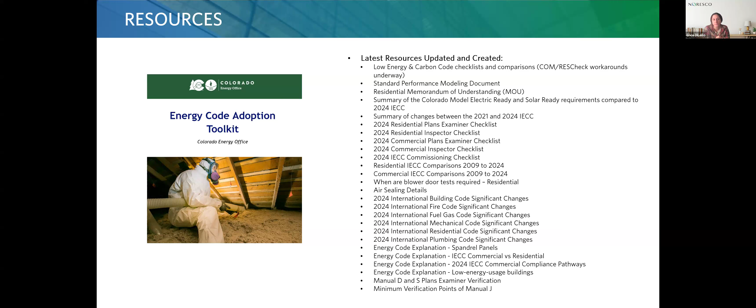Let's see what we got here on the last screen. This is probably my favorite resource and is available to anyone working on a project in Colorado, plan reviewing a project, or inspecting, you name it. You can submit a question on any of the I-codes, not just the energy code, and a subject matter expert gets back to you within a couple business days. It's a really great resource. Even as a homeowner, I've used it as we're doing plenty of remodels at our house, and it's really great to just understand what I need to do to comply with code, or what I need to inspect, or what I need to plan review. We're happy to walk through all of those items with you.

Let's get started with this presentation. Today we're going to talk about what is continuous insulation and when is it not continuous insulation—sometimes people think it's obvious, but it's not. We'll cover different types of insulation, the benefits, how to verify certain things through ES reports, how continuous insulation affects wildfire resilient construction, some common pitfalls, and a lot of helpful resources.

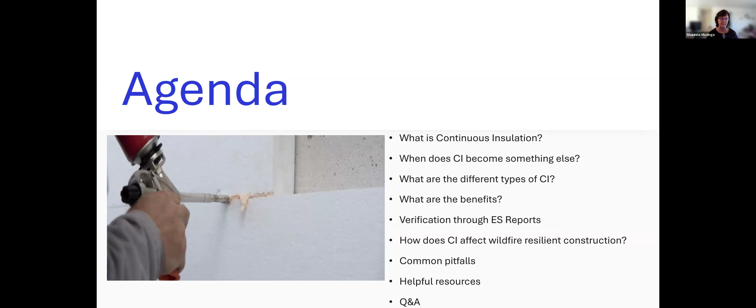So let's just dive in. If we look into the 2024 IECC and ASHRAE 90.1, and I think also the 18 and 21, they define continuous insulation. One thing I always tell people is you cannot use this energy code without paying attention to the definitions. It's one of the codes where you have to have the definitions chapter open at all times. Conditioned space—it's not what you think it is. There's all kinds of things that need further explanation in the energy code, and continuous insulation is one of them.

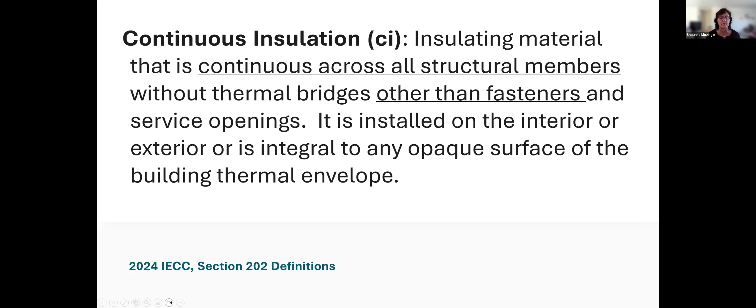It's defined as an insulating material that is continuous across all structural members, without thermal bridges other than fasteners and service openings. It's installed on the interior or exterior, or integral to any opaque surface of the building thermal envelope. So let's look at that—what is a fastener, what is a thermal bridge, and when does one become the other? When does it now affect whether or not I can call this insulation continuous?

He explains that a fastener is still technically a thermal bridge, but it's a fastener thermal bridge—not a linear or field thermal bridge. If you're familiar with the 2024 codes, thermal bridging starts getting addressed heavily for commercial buildings, but for residential, even some jurisdictions are bringing in thermal bridge requirements. So it's very important to know these requirements. A fastener is considered a nail, screw, clip, bracket, or brick tie—something that might penetrate the insulation but doesn't break it up. It doesn't create a big thermal break for the whole assembly; it's just a point thermal break.

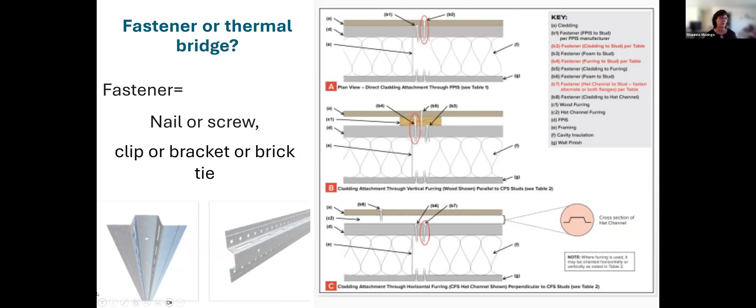So that really is kind of up to interpretation. I will tell you that the impact of the clip or the bracket or those kind of things, once you get past just a fastener, you probably need to incorporate some of this into the overall U factor or R value of your wall, so you're looking at the whole assembly and what's in there. When you get a lot of metal in there, it does change the performance of the wall a little bit, but not as drastically as something like a Z channel, right?

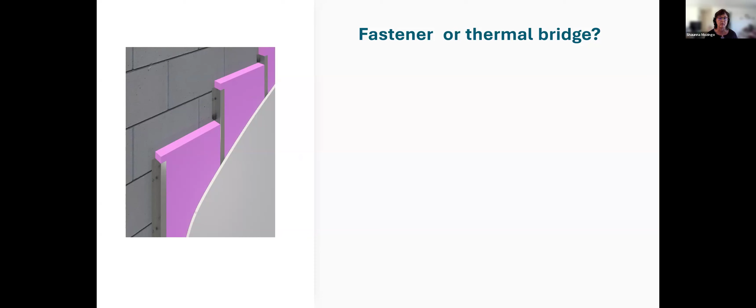That actually forms a full length thermal break. This is no longer a fastener. This has now created this insulation to be a cavity insulation instead of a continuous insulation. This is a full length thermal break, a linear thermal break of the cladding system. So you just need to know the difference between those, what the code is looking at as far as those go. So right now we have this linear thermal break instead of a point thermal break, where we now have to consider this to be cavity insulation.

Once you do that, you also have to think about, okay, I have cavity insulation on the inside of the building, cavity insulation on the outside of the building. How do I evaluate that in ResCheck or in a performance software? I will tell you that 90.1, I rely on 90.1 Appendix A very heavily as a plan reviewer, because there's all the assemblies and what their U factors are and R values are based on how the assemblies are made, whether it's roof, wall, mass wall, anything, and how it's made up, every single layer of it, and it'll give you the overall U factor of that whole assembly.

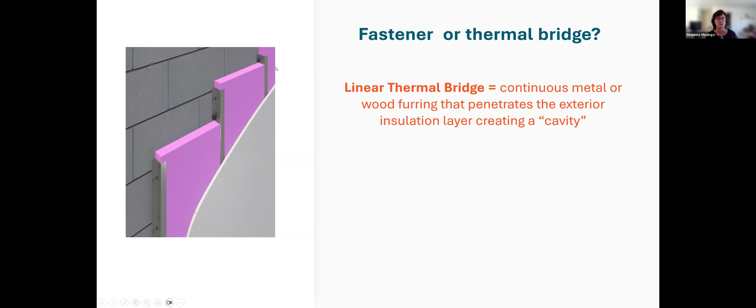It doesn't really have one in there right now for cavity and cavity, but the 2025 version of Appendix A will have cavity and cavity. So that's nice, we'll be able to evaluate that a little bit more for that U factor. But just want to know, I get a question all the time: if somebody uses these Z channels, can they still call it continuous insulation? By the letter of the code, no.

Several codes, right? Not just energy code. Also the IBC has requirements in there for fastening cladding or furring when you're using these foam plastic insulated sheathing as continuous insulation. So just know, I'm going to reference a lot today at continuousinsulation.org.

They really have, the industry has really stepped up. A couple of years ago, they sent me some questions asking what are you struggling with, what are code officials struggling with, what are designers struggling with, what are builders struggling with when it comes to continuous insulation, what do you need from us? And man, I let them have it, a one hour webinar on we need more details, we need more of this, we need more resources. And man, did they step up. They have so much information. Continuousinsulation.org is one of the places where they've really stepped up, and I'll show you more of that as we go.

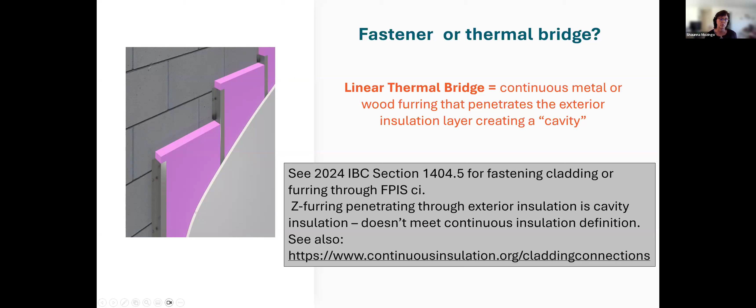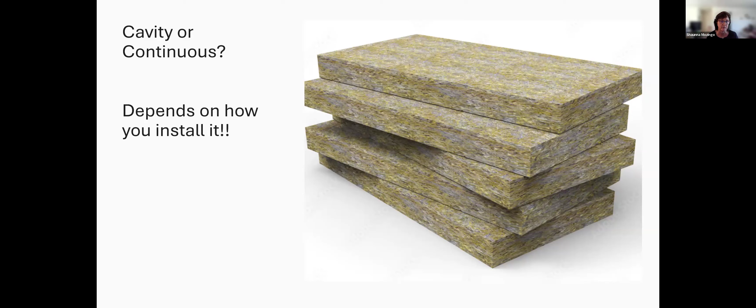But what is cavity insulation versus continuous insulation? That's another question that I get sometimes. Or if I'm reviewing a ResCheck or a performance report, somebody calls it continuous insulation, I go to look at the plans, I'm like, yeah, that's not continuous. What is it? It's not a product. A lot of people think, oh, I'm using rigid foam board, that's continuous. I'm using a batt of insulation, that's cavity. It has nothing to do, well, maybe not nothing, but not as much to do with the material as it does with how you install it.

So I can take rigid foam board and apply it continuously and have it be continuous. I could also cut it and put it in between two framing members, and now it's cavity, right? I can have blown in insulation, which is most of the time cavity.

I have yet to see a continuous blown-in insulation, other than sometimes in the attic where you fill up the truss bays with insulation, and that's cavity insulation. Anything you do over the top of that, some people might consider continuous. That's about the only time I've seen that.

I might have spray foam. Spray foam again is one of those products - unless it's in like a rafter seal, very rarely am I going to get continuous, because I would have to go over the studs to make it continuous. The whole idea of continuous insulation is to stop that thermal bridge at the stud, at the framing. So I'd have to go over that, which means I'm not going to install drywall or something, and so there might be some issues there.

I could have fiberglass batt insulation that is installed in a cavity - that's cavity insulation - but I also could have it hanging continuously on a wall, like in a basement. I see those, you hang it continuously and now it's continuous insulation. So just keep in mind the difference between cavity and continuous there.

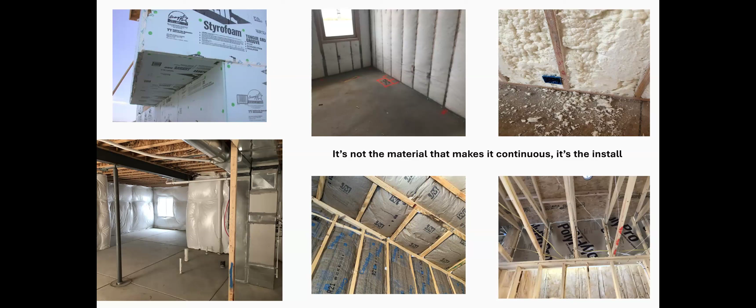Hey Shauna, we got a question. Yeah, more of a clarification - double wall framing, can that be continuous? We're going to talk about that in about 2 slides, probably, or 3. Perfect, thank you. That it? That's all. Okay, all right.

So we're going to talk about every kind of continuous insulation that I could think of, in just a minute. A couple things I want you to pay attention to, especially as a plan reviewer - and the more we start trading things off in the code or trading things down, this becomes a little bit important.

So I have this house and it's covered with continuous insulation. This is a house we did in a field study, I think in New Mexico, might have been Colorado. Anyway, when you get up close and personal, every insulation has to be marked - the code says how it has to be marked, with its R-value and all of that. It's interesting to see on some of these insulations where every manufacturer and every type of exterior or continuous insulation can have a different R-value per inch.

And even with this one manufacturer, their different series - the 150 series versus the 250 series - has a different R-value per inch. And it also acts differently at different climates. The colder it is, the more it's resisting that heat flow, so you have a higher R-value, whereas in warmer climates you might have a lower one.

So how do I know what the true R-value is of this? There's a couple things to know. So if somebody says on their plans, oh, I have 4 inches of EPS or 4 inches of polyiso or whatever - that doesn't tell me anything, because depending on the series it could have a different R-value per inch. Different brands could have a different R-value per inch.

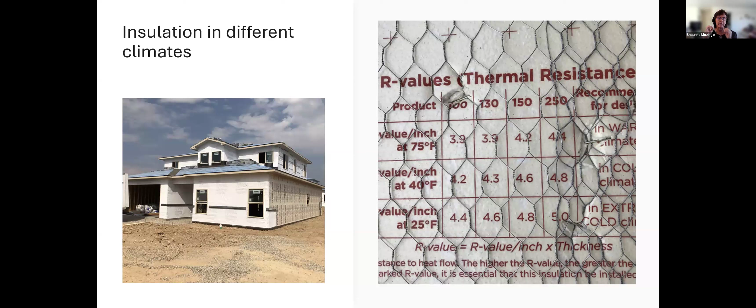So if they told me, oh yeah, my insulation is R5 per inch - well, it is R5 per inch in an extremely cold climate, at Series 250. But on a normal day by the code, it's a 4.4. Is it that huge of a difference? Maybe not, but it could be the difference in pass/fail if they're doing a REScheck or a performance report where they're counting on that R5 and barely passing with it. So just something to pay attention to there.

The other thing to pay attention to is when you call insulated siding continuous insulation. Poor Matt Dobson with the insulated siding industry - he and I fought for many years at the code hearings because I just didn't believe insulated siding should be called continuous insulation. And for many years it wasn't. But in the 2024 code, you can count insulated siding as continuous insulation.

Again, in chapter 3, it has to have the R value labeled on the product, and it has to meet a certain standard, and then it also has to be installed according to manufacturer's install instructions. That's just in chapter 3.

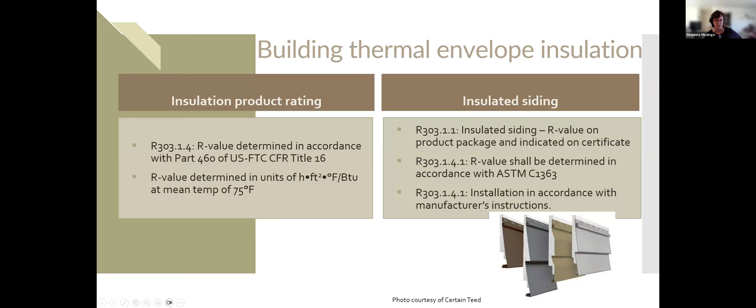But because of this continuous insulation, here's another slide that I use for a different class, but I wanted to show you because it has a better picture that this insulated siding, its thickness is different and it overlaps, and there's airspace and there's air movement.

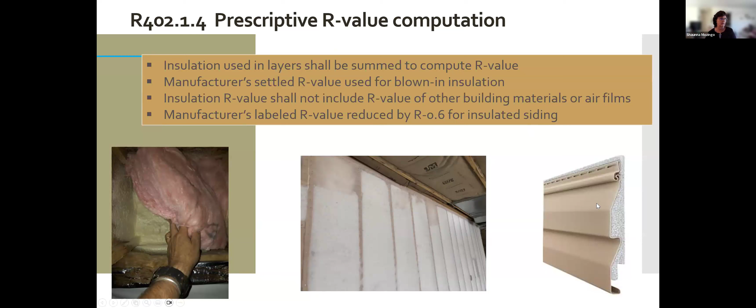So the code, the agreement between all of the people in the code hearings was, if you want to count it as continuous insulation, you can, but you have to reduce the R value by 0.6. Most of these come in at an R2 on the package. You'll see an R2, so now it's a 1.4. That's what you're looking at on ResCheck or something else. So make sure you're paying attention to that.

All right, let's look at the different kinds of insulation. There's a bunch of different insulations out there, a lot of rigid foam boards, some wools, some batts, there's all kinds. So let's just go through this. I know it's a lot of info on a slide, we're just going to focus on one thing at a time.

This XPS is kind of known for its strength and durability. It offers some pretty good moisture resistance, and so it's really pretty popular for below grade and exterior wall applications. It's about an R5 per inch, depending on the manufacturer and the model, if you will.

It's kind of a mid-range price between EPS and polyiso, it fits in there somewhere. One thing I think people don't realize about XPS, and even some of the other insulations, is that while they're slow to absorb moisture, they're also very slow to release that moisture. When insulation holds moisture, it loses its R value. So this insulation, even the manufacturers won't warranty it for more than 90% of its R value because it loses R value over time because it holds moisture. And the longer it's in, the less they warranty it, right? The warranty goes down over time, just like the R value. So just something to keep in mind about that product.

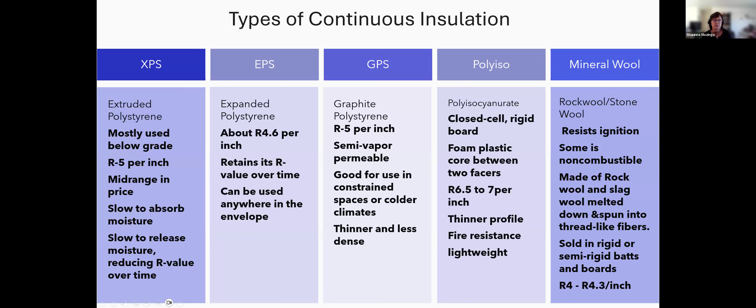It's sold usually in either a rigid batt or a board, usually in walls and attics, but we're starting to see more and more of the loose fill material being blown into some cavities. So a little bit versatile there, but starting to get more into that fire resistant construction.

What about a double wall? There's some great info on double wall. I can't get into it hugely, but I did a webinar, I think last year, on advanced framing techniques that really included double walls. There's also some great information by PNNL on that. So pay attention to those.

But the way the double wall works depends on how you build them. A double wall doesn't automatically give you continuous insulation. There's so many different ways to do it. A common one is to build two walls and offset the studs, offset the walls, so you have cavity insulation in both walls, but the studs are offset so you don't have that constant thermal bridge. That's one way of doing it.

Another way I've seen is to build one structural wall with cavity insulation, then a layer of continuous mineral wool or rock wool on that wall, and then build an interior second wall that just handles your plumbing, mechanical, and electrical. So that one wall that holds your insulation also has a layer of insulation on it. There's a couple different ways to do double walls and call them continuous.

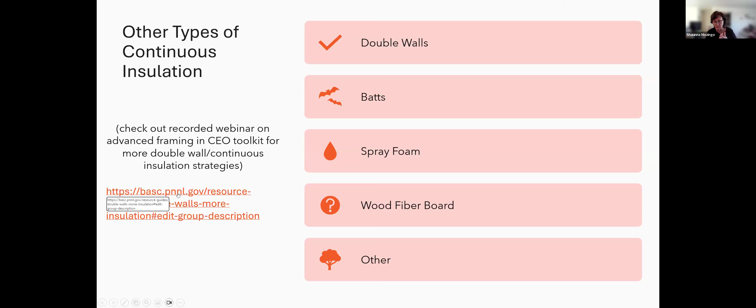The idea is that you have a continuous thermal break. You do not have thermal bridging where you have that heat loss through the thermal envelope.

Batts can be done continuously too. Like I say, you can hang a batt continuously or you can shove a batt into a cavity. So there's lots of ways that batts can be done as continuous insulation. I mostly see that in basements or crawl spaces.

Spray foam, spray foam, can you really do spray foam continuously? That's one of those where you'd have to go around all the studs. It just depends, maybe if you were doing that double wall system, you could fill the cavity plus go over the studs, then you'd have cavity plus continuous, and then build your second wall. Maybe you could do it that way because you'd put the drywall on the inside of that second wall. But it's harder to get spray foam or blown-in products like that to be truly continuous.

Wood fiber board, that's the insulation made from certified softwood chips. I like it because they're using the wood chips left over from lumber production. They create it into this loose fiber body that they use. The nice thing is a lot of times they'll mix it with borate, and so it becomes flame retardant and also resists mold and mildew.

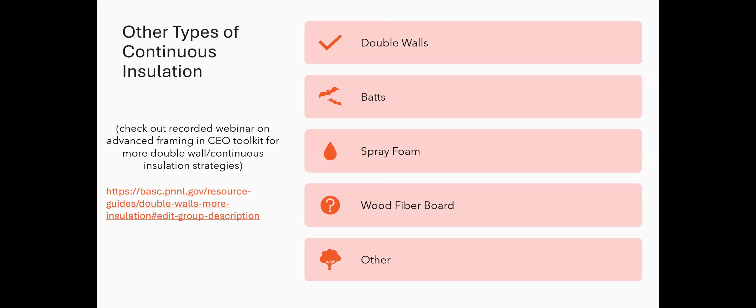Great, all right. Why continuous insulation? Well, people think, okay, continuous insulation is just more insulation, so there's probably better energy code performance. That's true — the building will perform a lot better because of the thermal break you're giving it. But it also has a lot of other benefits. It reduces the energy cost of the building, not just because we're heating and cooling it less — if you think about that benefit alone, a lot of people aren't thinking big picture.

We're reducing the cost of our energy bill because we're not having to heat or cool as much. The building is super insulated, so it stays the same temperature for a long time, and my furnace isn't constantly turning on.

So what does that do? That also means I probably can use smaller heating and cooling equipment. I don't need as many BTUs to heat that space, and it's not going to run as much. So it's not just an energy bill, but also the cost of the mechanical equipment and some other things we're going to talk about.

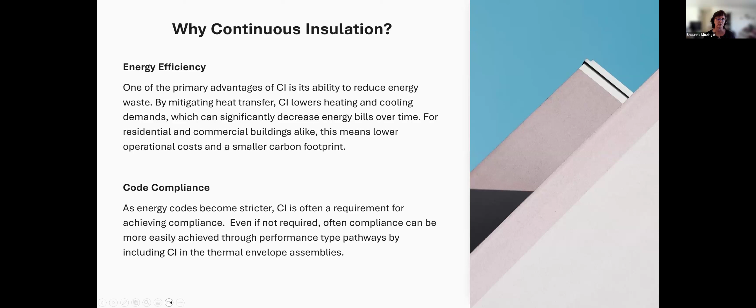So it's a big picture. Code compliance, sure—there's times where if you go prescriptive, it's going to require you to do two layers of insulation, a cavity and a continuous, or something. We're getting more options in there, so it's less times that it's required. But most people will use a trade path, and even then you're going to get a way better trade for continuous insulation than you are for cavity. So code compliance, it's pretty easy.

Thermal bridging is one of the big ones. Wherever I have studs, or metal, or concrete, or a patio that goes all the way through the whole thermal envelope, I have these bridges there where I'm losing all of this heat. And so continuous insulation stops that, and it offers some great things there.

It definitely reduces moisture damage, minimizes thermal stress, preventing mold, rot, and material degradation, and then enhanced comfort—insulation makes things more stable for the indoor environment. You turn your heat on, it stays that way, it's just not changing all the time.

One thing I will just say is, it's just like everything else—the tighter we make these buildings, and the more insulation and all of these, they all go together. You cannot ignore mechanical ventilation. You have to bring in some ventilation, so just keep that in mind.

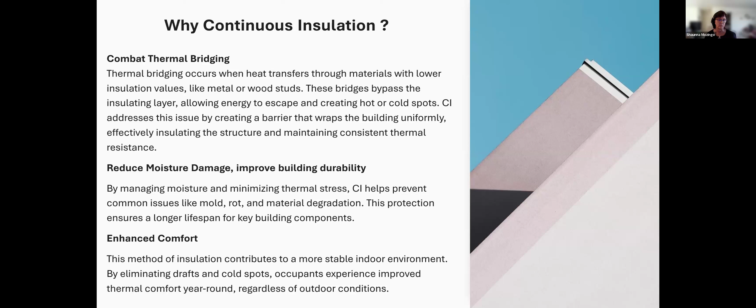Another thing is it's the key first step in building electrification. If you want your buildings to be all electric, you better make sure you're building buildings that don't carry very much load with them. When we were writing the 2021 codes in Aspen, the city council wanted all electric, and we said, wait, we have to start with a really good thermal envelope—build that first so we can bring those loads down, so we aren't talking about huge oversized panels and oversized transformers and crashing the grid. Let's bring the loads down first through a great thermal envelope, and then we'll talk about going all electric. It's one of those first key things people need to be doing, and I think people forget about that.

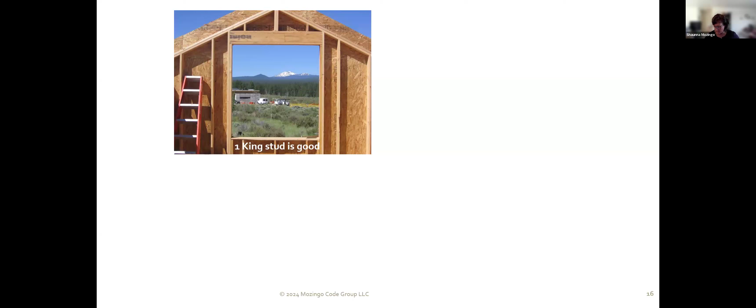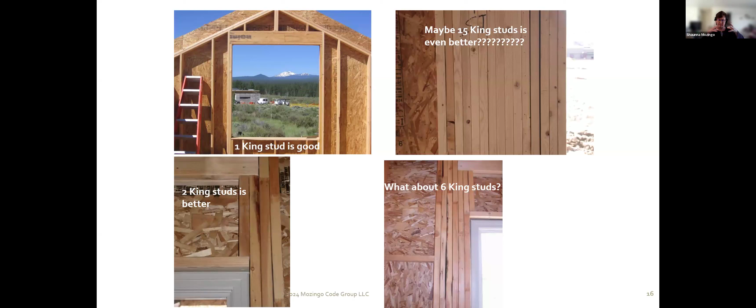Some things about thermal bridging—I always talk about this in my building science classes. We look at the structural provisions and think, okay, we have this window, framing it, one king stud will be good. Well, structurally two king studs is probably better. Well, six has got to be really, really good. What about fifteen? What is that doing to our envelope? Not only is it overkill structurally, but we get these things like stud packs, and what are they doing to our building assemblies?

So if you think about this, wood is only about 1 R-value per inch, whereas the insulations we saw are between 3.5 to 7.

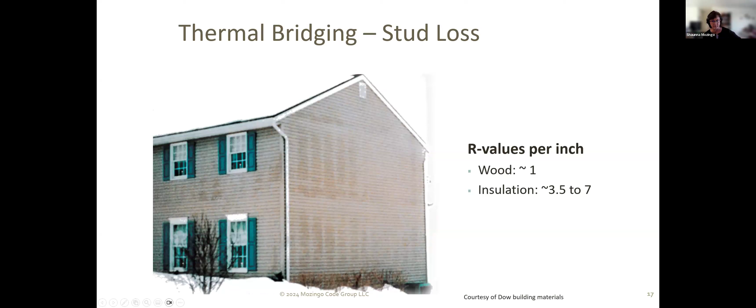We want more insulation than wood. What ends up happening is you can see on these buildings every single stud because of all that thermal bridging. There's only 1 R value per inch, so we're not talking about much resistance. We end up having all this heat loss. We don't get that if we put continuous insulation on the building, and we end up with a much better U factor and better code compliance. You're going to always pass much easier with continuous insulation than without it.

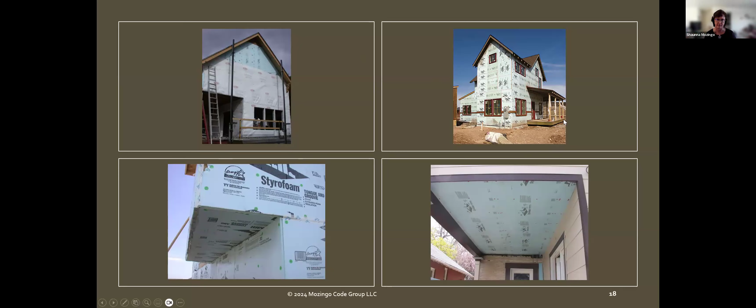Or you ever walk in - I want to teach a full day class, I could show all these pictures of here's why people think the code is so expensive, and it's got little pieces of spray foam blown everywhere, but it's not doing anything. Utilize it - if you're going to put it in, make it work for you. So there's - you can have one product that has many benefits.

You already have a water resistive barrier. It could be, depending on how it's installed, and you've got to pay attention to the joints and seams. One thing that I do is ask for the ES report, the ICC Evaluation Services report, to see if it was evaluated as a water resistive barrier, and if it has been, how it has to be installed to actually be called that. But it could be the water resistive barrier, it could be the air barrier if every joint and seam was sealed. It could be your vapor control layer.

Controlling vapor in and out of that assembly, both ways, depending on whether it's hot or cold outside. And definitely your thermal control layer. So if I have one product instead of 4 different products - I think people are not using it to their benefit. Oh, we have to complain about putting in continuous insulation, but you don't have to do all those other things if you do it correctly.

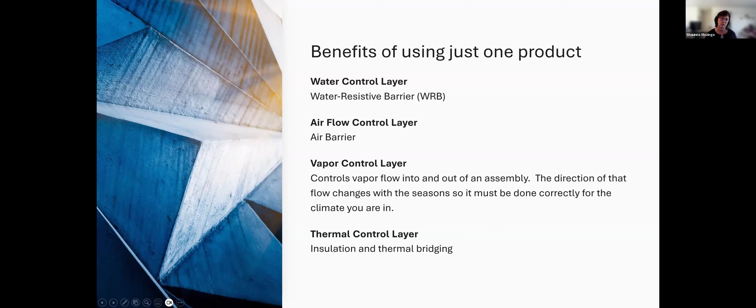So thermal bridging is one of the big things. Again, Jay Crandell, my buddy - if you've ever been to the Educational Institute, we have a class. He's taught several classes on continuous insulation or building thermal envelopes. He's such a good resource. But I love in this presentation - and you're going to get this presentation, you'll get his presentation on thermal bridging, the whole PowerPoint. He sent me the whole PowerPoint - that you can have small details with a large impact.

It was interesting to see in the table it says you have an R20 or an R whatever or a 20 plus 5. Well, people think that an R25 is equal to an R20 plus 5, which is totally not true. An R25 is in the cavity getting all this thermal bridging, with a lot of thermal bridging. So installed in all of that wood as a cavity, it ends up being about an R19 when it's all said and done. An R20 plus 5 that breaks up the thermal bridging and gets installed is like an R22 because you still have studs and stuff in there. So you see that an R25 is not the same as an R20 plus 5. They're very different in how they're installed.

This is why we're trying to get people to shift from looking at the R value of the insulation and start looking at the R value of the entire assembly of how it works together.

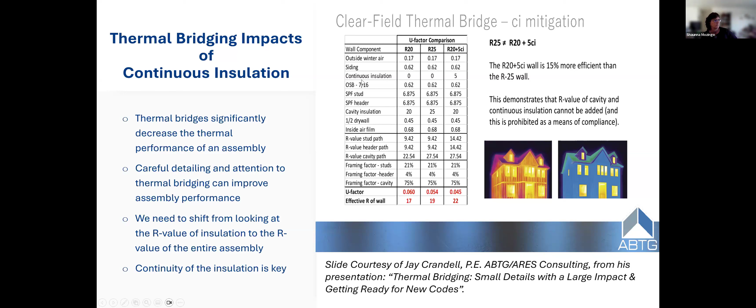Then you're really going to see where continuous insulation plays a role in there. So be sure to read through this. There's some great information in there on thermal bridging.

Ways to mitigate thermal bridging: reduce your framing factor, go from 16 inches on center to 24 inches on center so you have less framing. That's one way of reducing some of that. You use double stud framing, something like that. Use low conductivity structural materials, things that don't use metal. Apply continuous insulation over it, or use low conductivity fasteners.

Some other things to think about: we see these metal fasteners. Now there are all kinds of new fasteners, or even these little plastic sleeves, so that your fastener isn't even as long, so you have less metal. There's thought that can go into this. The code isn't going to require it, there's too many ways it could be done. But there's lots of ways if you do these to drop that U factor of your wall, increase the R value of your overall wall, and deal with those thermal bridges.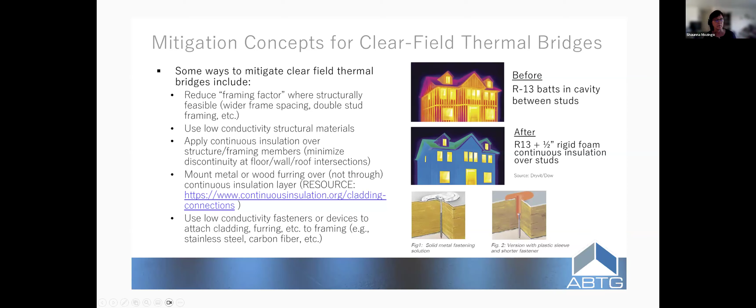Couple things on ES reports I just want to point out. If we say I want to use my continuous insulation, my rigid foam board as a water resistive barrier, or I want to use it as my air barrier, can it be done? Find an ES report. So this is like Insulfoam, and it gives you Insulfoam EPS, R-Tech, and Thermal 3HT. All of those evaluated here to these editions of the code. This one applies to those. It'll tell you what code it was evaluated to, the properties it was evaluated for, and even the green codes - it's got the California codes, the NGBS, the ICC 700 codes that it's evaluated to.

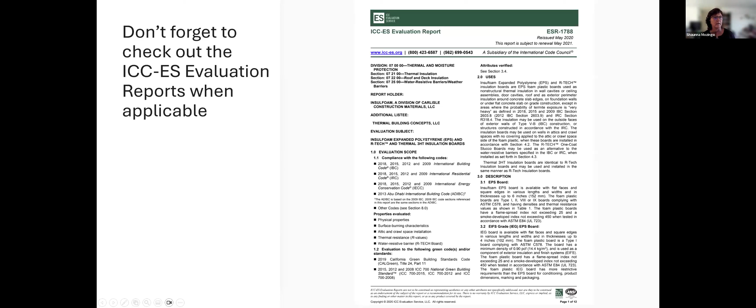It looks at the uses. How is it to be used? Okay, I've got this ES report, here's the uses, I can use it as a non-structural thermal insulation in cavities or ceiling assemblies, roof, as exterior insulation around slabs, walls, whatever - it gives me the codes. It can be used on the outside faces of exterior walls of 5B construction or anything built under the IRC, used in attics and crawl spaces. It gives you all of this information of how it can be used.

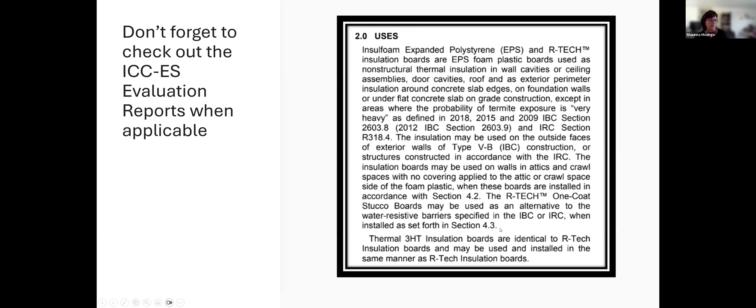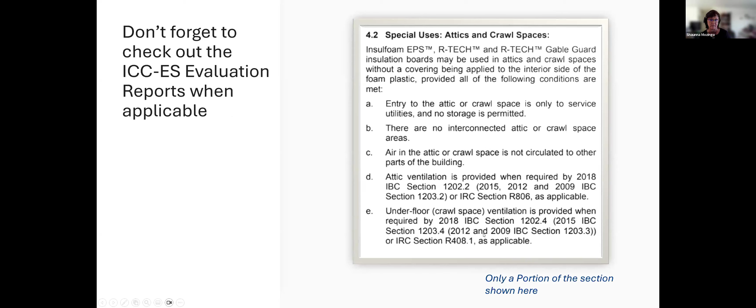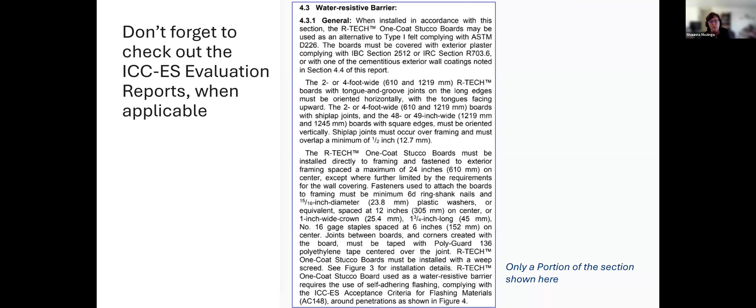Then it also tells you it can be used as a water resistive barrier if it complies with section 4.3. So here's 4.1, all the general about installing it, how it can be used, everything general about it. Here's section 4.2 if you want to use it in an attic and crawl space and not have to cover it - it can be used in attic and crawl space without covering applied as long as you do these things. You can use it as a water resistive barrier if you install it this way, these sides, this kind of fasteners - install it this way, is your water resistive barrier. So it's really important to pay attention to those install instructions and the ES reports to see if it can be a code compliant water resistive barrier.

Another thing about ES reports to pay attention to is sometimes they have a lot of proprietary information. So you could see this right off of their ES report that talks about maybe we have R-Tech or R-Tech tape, Polyguard, polyethylene - so there's some things in there that are pretty proprietary. Make sure that that's what they're using, unless somewhere in the wording it says 'or equivalent'.

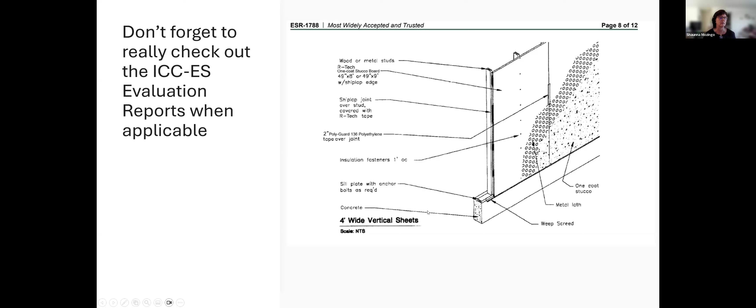We get a lot of questions about whether we can still use continuous insulation and whether it conflicts with the structural hardening requirements. I'm just going to say, it depends. It depends on what you want to build.

For the most part, it's like anything else. If I'm going to use a rated wall, I'm going to build that rated wall. If the rated wall assembly says I can use continuous insulation in there, then I can. If not, I'm going to put it on the other side of my wall. I'm not going to include it in the assembly, I'm going to attach it to the assembly. So there's different ways to do it.

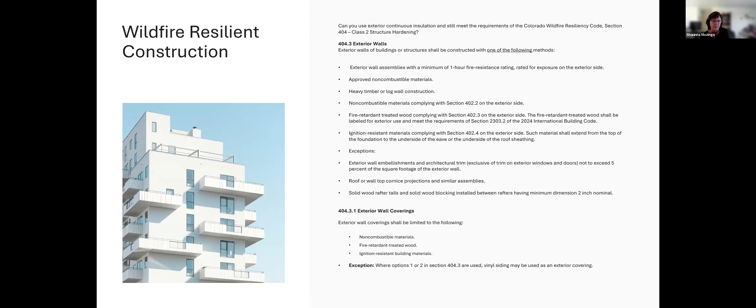I've been working with Chris, trying to get some information that we can put out to you on different types of assemblies and what would be considered allowed. But there's a lot of info out there already.

He starts this whole article by saying, if you take rock and you melt it and blow air through it, you get fluffy rock, and fluffy rocks don't burn. If you take gypsum and make it into sheets, you get sheet rock, and guess what, rocks don't burn. Also, metal doesn't burn - okay, some metals burn, but you get the idea. If you take wood that burns and add rock and metal to wood, you get wood that maybe doesn't burn. He says we could be really onto something.

There are all kinds of places where we have to deal with wildfires and all kinds of places where we build right next to our neighbors. Where we build next to our neighbors, we've kind of decided it's a good idea if their house catches on fire, ours doesn't, and vice versa. He goes into all this humor before he gets into the technical stuff.

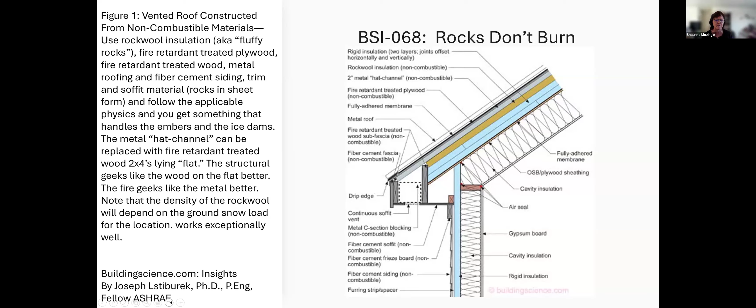So just be sure you're checking out his articles. There's all kinds of details at buildingscience.com. He's got it for walls, and here's another insight - wall assemblies with non-combustible cladding, fire retardant or fire resistant continuous exterior insulation, how to install it, and here's the assembly.

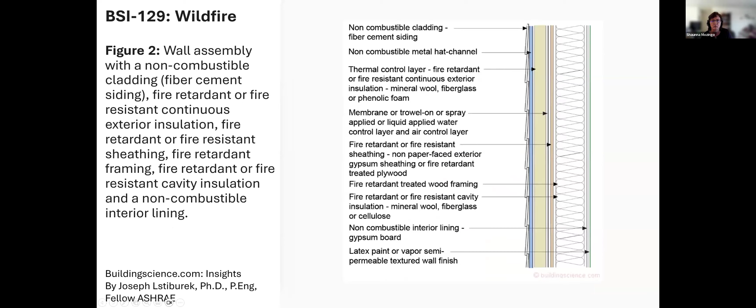You can also go to continuousinsulation.org. Click on applications, go to their fire performance section, look at all of the fire performance with using rigid foam board and all these different assemblies and how to meet NFPA 285.

You could go to Rockwool - I'm not picking one organization, I'm going to check them all out. They've got a great website. I can go to resources and tools, look at fire performance, and look at wildfire resilience. This is an amazing technical bulletin. I sent it out to many of you a couple months ago, but it will be sent out to you again. It's a great bulletin.

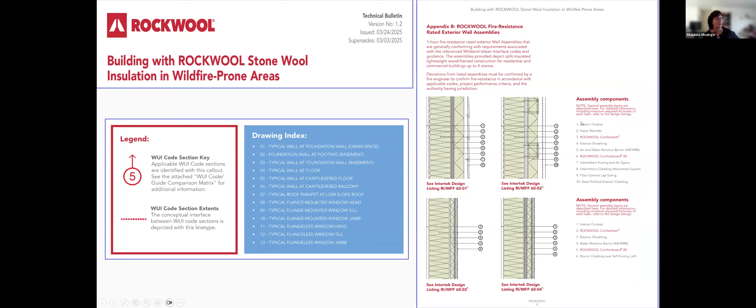It goes through, gives you all the kinds of details for different kinds of assemblies, how to put them together, how do they work together. So make sure you're looking at that technical bulletin. Like I said, I'll send you a copy of it.

There's FEMA, so this is a good resource. FEMA's got this Builder's Guide to Construction in Wildfire Zones, talks about how they assess all the different stuff, planning, defensible space, structural hardening requirements. They have a lot of resources in there.

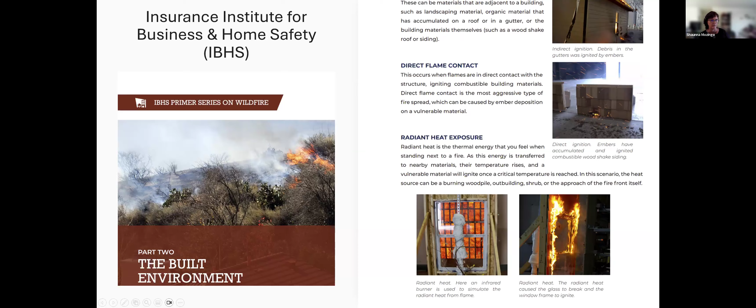Check out the insurance companies too, right? The Insurance Institute for Business and Home Safety. They have put out a wildfire bulletin. They have a series on wildfire. Part 2 is the built environment and talks about all the ways that fire hits, whether it's embers or flame or heat exposure, radiant heat. Talks about all these different things, gives you resources and tools for them.

We've analyzed these kinds of disasters, and here's some different tools: wildfire prepared home, a model ordinance you could do for a wildfire code. They have this handy map that shows, I think, something interesting.

If you were looking at the whole map, light blue is people who have a statewide code and are actually enforcing it. Dark blue is we have a statewide code and it's not really uniformly getting enforced, and black is we don't have a statewide code. Here's Colorado - we don't have a statewide code for all the codes. Red is wildfire occurrences, yellow is tornado occurrences, and then you have some hurricane occurrences down here on the coast.

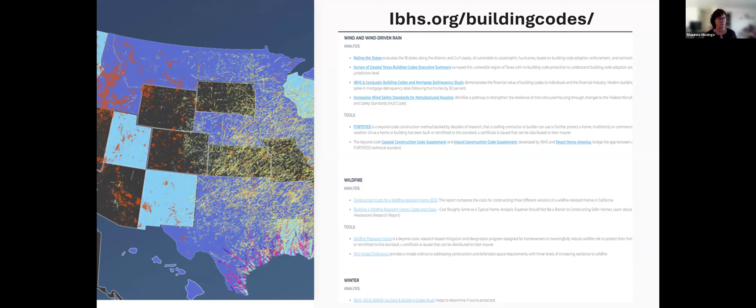So it's interesting, these reports and things. They have a great website too with a lot of good information, so everybody out there's got information on it. I know everybody has a billion questions on it, but there's so many resources.

Couple things: avoid some common pitfalls. Stagger your joints in continuous insulation to minimize thermal bridging. Make sure all the seams and joints are tight, tape sealed, however the manufacturer requires it. Be mindful of material that can conduct heat, such as metal fasteners and structural elements.

Identify any wall penetrations, including vents and pipes, make sure they get all sealed up. Select fasteners that are compatible with the insulation material and the building substrate - improper fastenings lead to gaps or compression. Incorporate proper flashing and moisture barriers to prevent water intrusion.

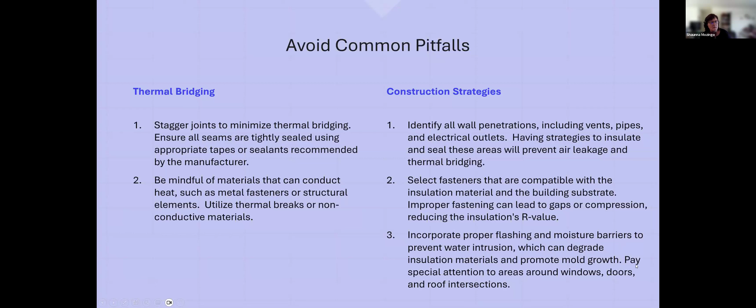Here we go - calculate the dew point. Joe has a building science insight on hybrid assemblies where he's talking about dew point and how much insulation you put moves your dew point and where it's at, and how to build those assemblies. Brad put a dew point calculator in there. That's something for the designer - that's not a code requirement that we can do.

Foam sheathing is not a structural wall bracing material. We really need to make sure that - you might have an insulated sheathing that you're using, but the insulation itself isn't the structural wall bracing that you use. So pay attention to that.

Don't rely on foam board for wind resistance. I might have some wind - some people install their insulation right over the framing. That's not going to get you wind resistance. You have to have that sheathing for that.

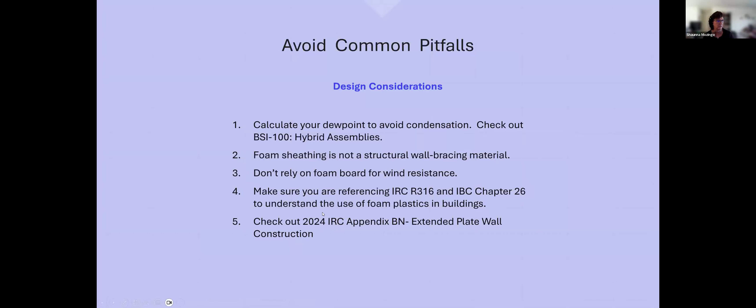Make sure you're looking at IRC R316, IBC Chapter 26 to understand everything about foam plastics if you're using that kind of continuous insulation. And then check out IRC Appendix BN, Extended Plate Wall Construction, where it talks basically about having 2x6 top and bottom plates but 2x4 construction, so that I have a uniform wall by having space for my continuous insulation - it's a prescriptive design for extended plate construction. That's an appendix now in the '24 IRC, so pay attention to that.

Just a couple things - I know we're getting there.

Avoid drive-by inspections. This was a house I was looking at in another state. Drove by, I was like, oh yeah, they did the whole house in continuous insulation. No, they didn't - that is paint. Now you could say, oh, they were trying to cheat and think that you were just looking at the paint. It's actually a water or fluid applied air barrier, but it does look like - at first when I saw it, I thought that they were just trying to cheat the system and make me think that they were doing insulation.

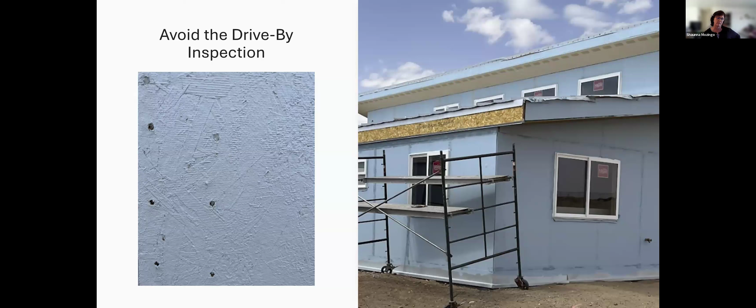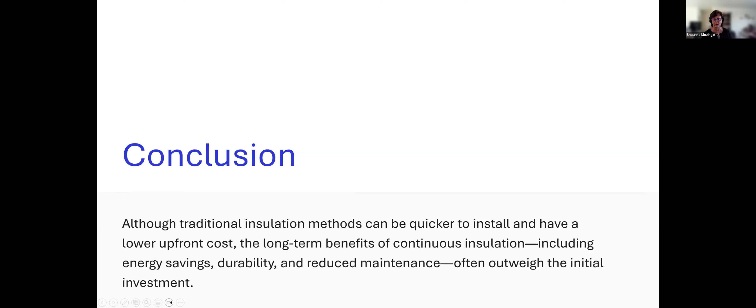They weren't. Although traditional insulation methods are quicker to install and have lower upfront costs, the long-term benefits, hopefully you understand, can outweigh that - because it's not just about the R-value anymore. I have this video, but I'm not going to show it.

It's Jay Crandall walking through how to use their website. You can see they have material on there for every different trade and every kind of thing. There's resources, there's so much information up here. This website alone is one of my new go-tos. I love it, so helpful. Not just for that—they have all kinds of calculators in there for how to calculate all the layers of the assembly together to get your R value or your U factor, but they also have articles in there on wall bracing and all kinds of things. So make sure you're checking that out.

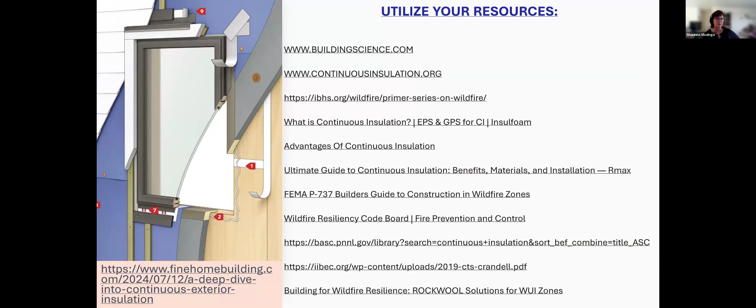And then, I'm not going to show that, but this is the list of all of the resources that I'm going to be sending to you. So look for those. All right, I think we have some questions. Please know, again, not enough time to get through everything. I will go through as many questions as time allows, but you're going to get so many resources. I hope that you utilize them because they really are helpful.